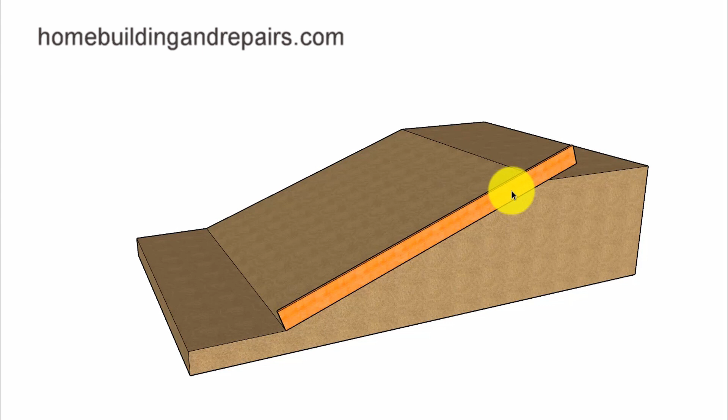However, it looked like the individual lucked out because the slope on the hillside must have been between 30 and 35 degrees, and definitely wouldn't have worked if we had a hillside like this one that was about 20 degrees. So this one here is 20 degrees with a 16-foot board, and this one here would be about 30 degrees, which would be ideal for a stairway. This one here is 45 degrees and would not be ideal for a stairway.

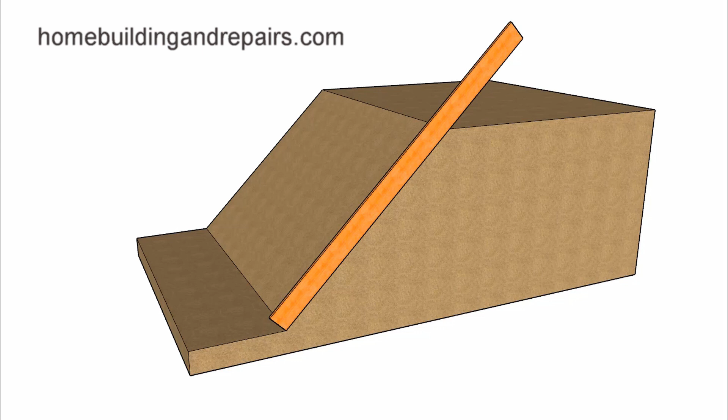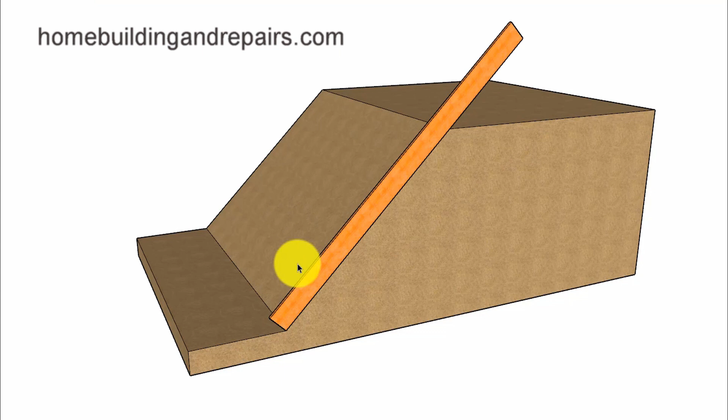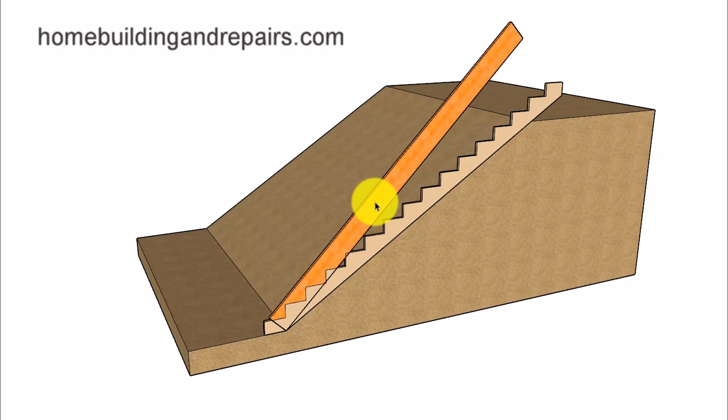Now, the reason why I'm providing you with these different views is to prove a point that you won't always be able to just lay a board up against the side of a hill and then lay out a stair stringer with whatever measurements you feel will create the best step, which is what it looked like this person did. And I believe they went with about a 7-inch riser height and an 11-inch tread depth, and that's what I did here.

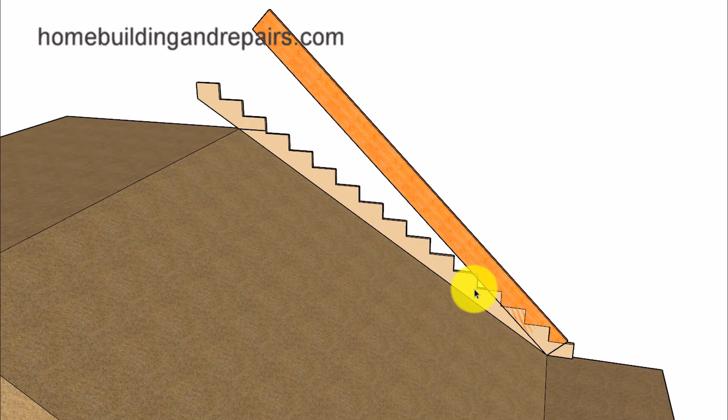So here we have a board that was sitting on top of the hill with a 45-degree angle, and in order to make this work, we are going to have to remove this much dirt if you have this situation, and then we will need to make some modifications to the stringer. And since we have the bottom of the stringer sitting on top of the lower level, then we will go ahead and go to the upper level and draw a line across here that will represent that level. And then cut the stringer to make it fit.

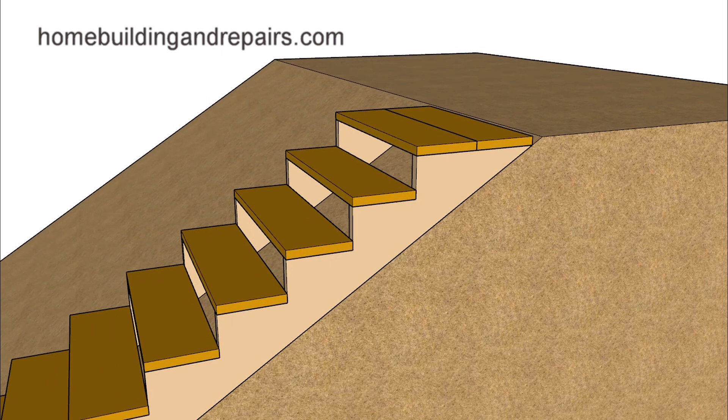And you can see here where if the upper level was 2 or 3 inches higher, or the lower level was 2 or 3 inches lower, that this stairway wouldn't work. However, at the same time, keep in mind that we removed some of the soil to make this stairway work also. So we're not just laying a board on top of the hillside.

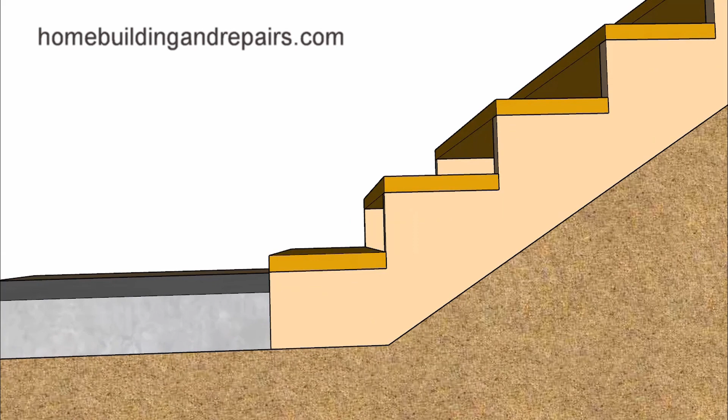And of course, if we had a situation where we had a walkway on the lower level and a walkway on the upper level, we're probably not going to be able to make up any numbers we want to make this stairway fit in this particular area, which of course is the main point I'm trying to drive home in this video.

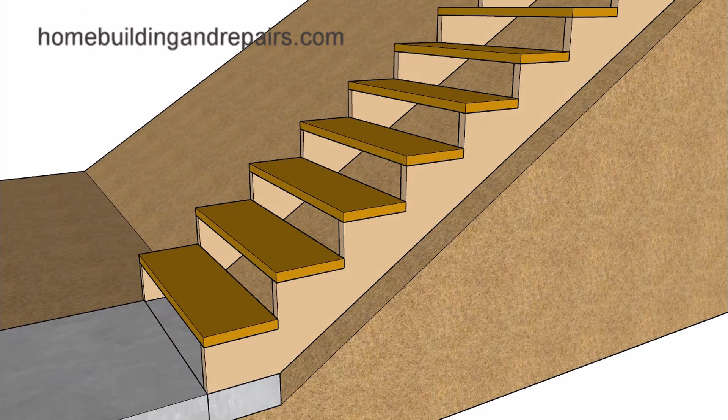And I realize that some of you are thinking, why don't you just set the stairway on top of the concrete pad below? Well, then you're going to end up with something like this. Again, a situation that won't work as well as if you figure out and calculate the total rise and run of the stairway. And of course, if I use this on the hillside with a 30-degree angle, it might not be necessary to remove any soil.

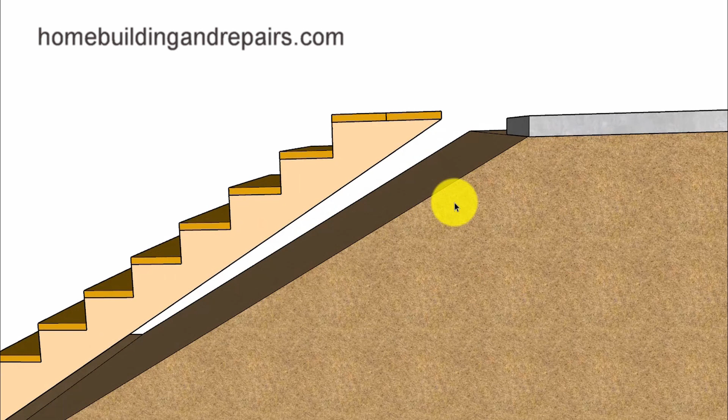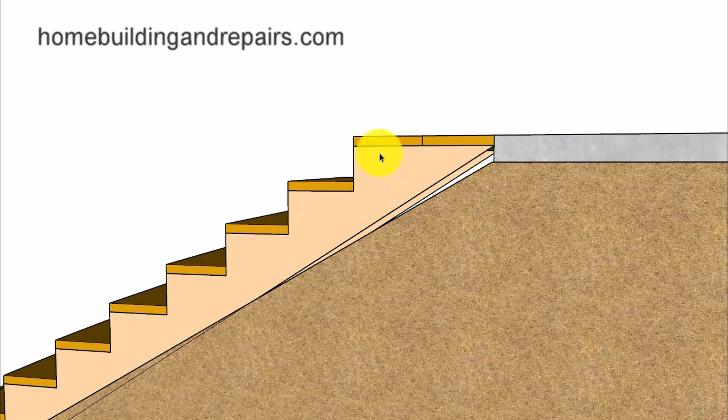However, again, you can see where we have a problem here. Because unlike the other problem we had before where the stairway was a little too tall, this one here isn't long enough to reach the walkway. However, if you do run into a situation like this, you could always pull the stairway over or extend the length of the upper walkway. And of course, in this situation here, that is what we did.

However, you can see where we're going to need to remove some more soil and extend the lower walkway. However, we're still dealing with this problem here, or a lower riser that might not be the same height as the other risers in the stairway, creating a building code problem.

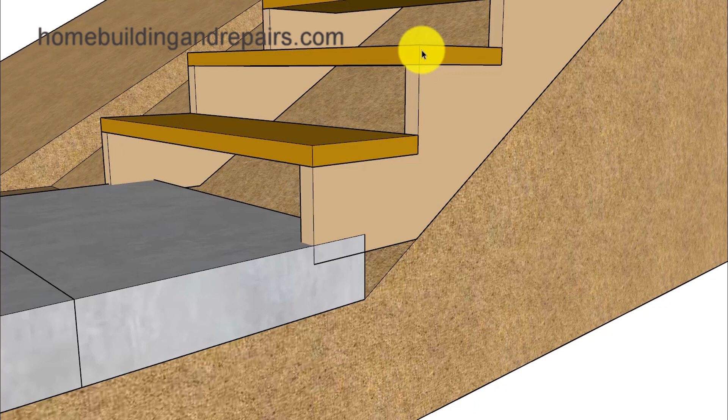Next up, let's go ahead and take a look at what our prefabricated stair stringer would look like on a hillside with a 20-degree angle. And of course, the quick fix for something like this again would be to extend either the upper or lower walkway and either add or remove soil in that area.

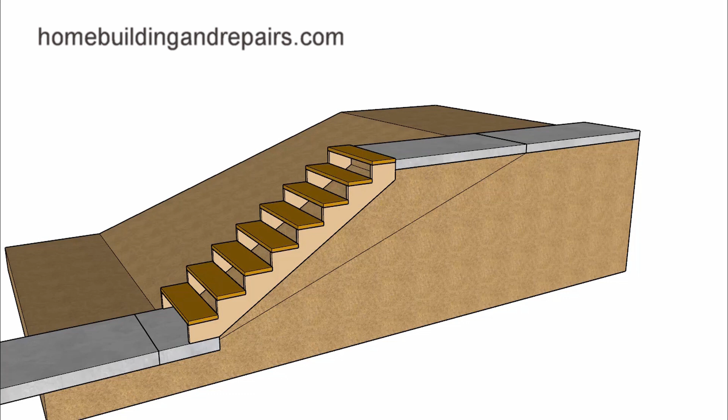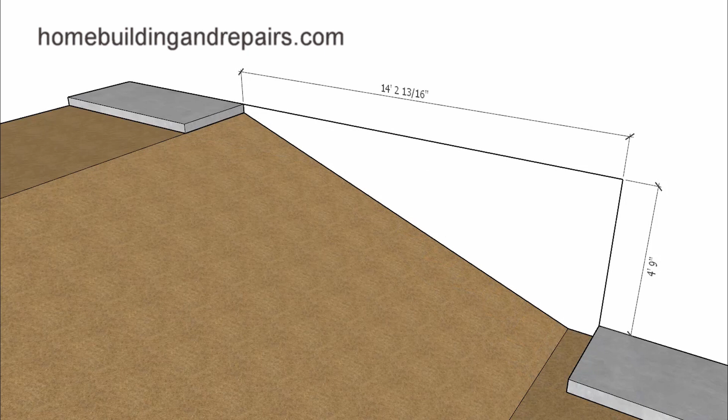And of course, if you do need to extend the walkways, then there's a good chance you will be able to raise them up. For example, here we could have raised this end of the walkway up about a 1/2 inch, or if we needed to lower it, then that might work also. So enough of the trial and error stuff. This is what you're going to need to do.

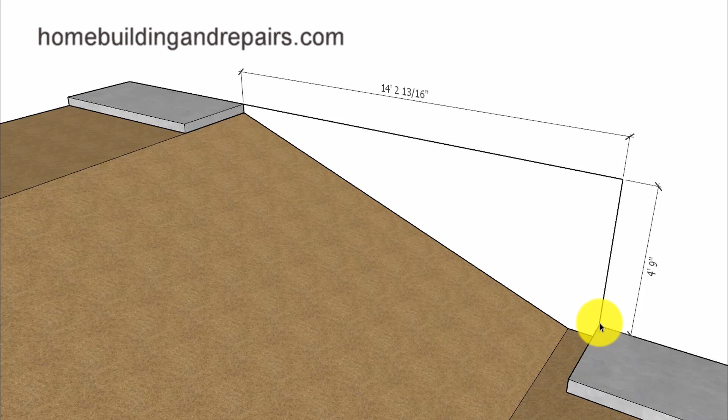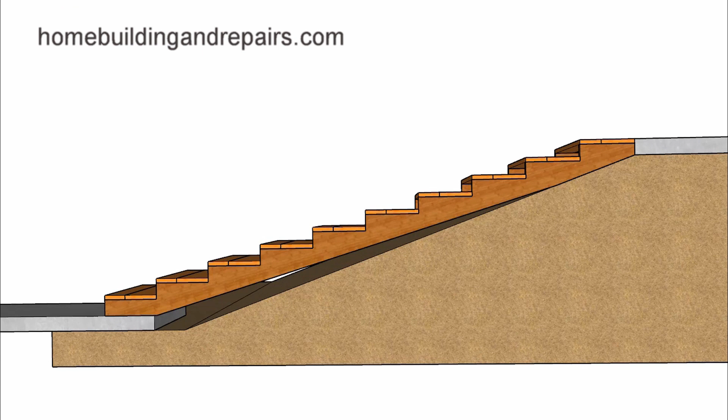And I have plenty of videos on that at our website. And I will try to put a link in the video description box or comment area to those videos to provide you with a way to figure out the total overall rise and the overall run, so that you can build a stairway that is going to fit on the hillside without removing a lot of soil or making other unnecessary modifications.

So the moral to this story is simple, and that's going to be that every once in a while you are going to luck out like the individual did in the video. However, if you need the bottom of the stairs to line up with point A at the lower level and point B at the upper level, then you're going to need to do the necessary calculations to make that work.